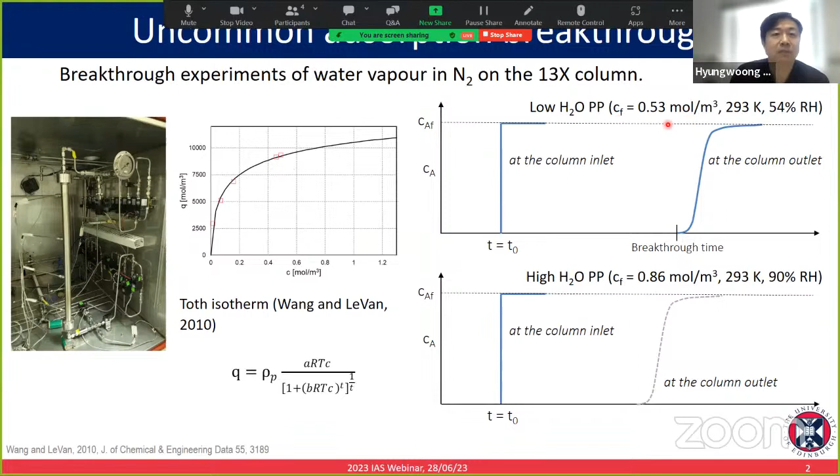When I did the adsorption breakthrough experiment using this column at low water partial pressure in the gas, the concentration of water vapor in the nitrogen was 0.53 mole per cubic meter, which is equivalent to 54% relative humidity.

Once I start the breakthrough experiment, I increase the concentration of water vapor at the inlet. After some time, the column is saturated with water vapor and the breakthrough starts. The water vapor breaks through the column, and the water concentration at the outlet increases gradually up to the feed concentration. Then the column is completely saturated, and we can terminate the adsorption breakthrough experiment.

Now I want to see the effect of the water vapor concentration on the breakthrough dynamics. So I increase the water vapor concentration in the feed to 0.86 mole per cubic meter, which is equivalent to 90% relative humidity, and I start the experiment.

What I expected was that the breakthrough time would probably be shorter, so the water vapor would break through the column earlier than in the experiment with the low water vapor partial pressure, and the concentration would increase gradually up to the feed concentration.

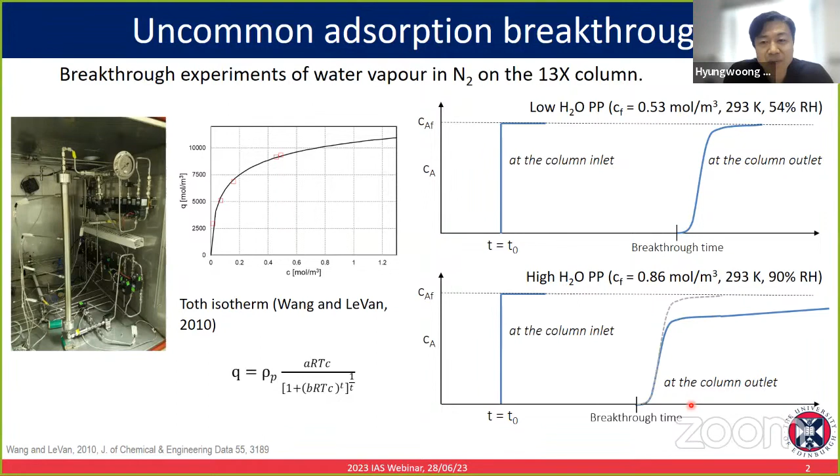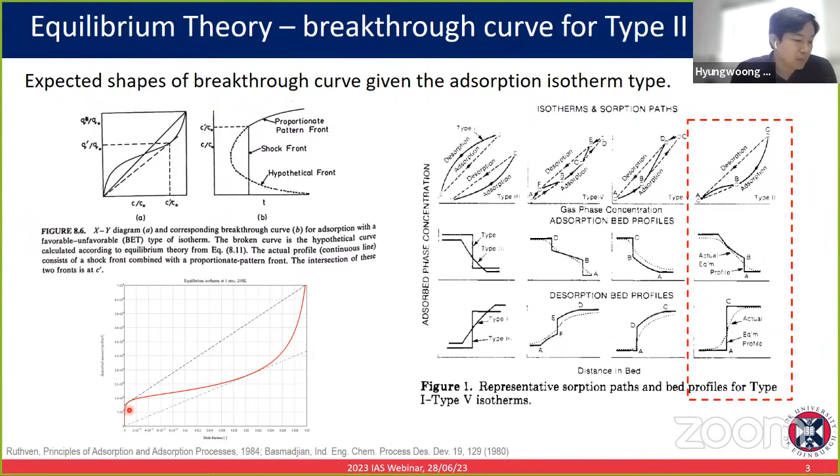So I extended the range of concentration for the water adsorption isotherm measurement, and yes, it is clearly a type 2 isotherm, with capillary condensation taking place near the saturation pressure of water at a given temperature.

So if you look at the experimental result of the adsorption breakthrough at the low water vapor partial pressure in the feed, this partial pressure of water is within the favorable region of the isotherm, so we get a simple shock.

But if you increase the water vapor concentration in the feed, you may see a simple wave formed in the high concentration region, at high water vapor partial pressure. This phenomenon is very evident.

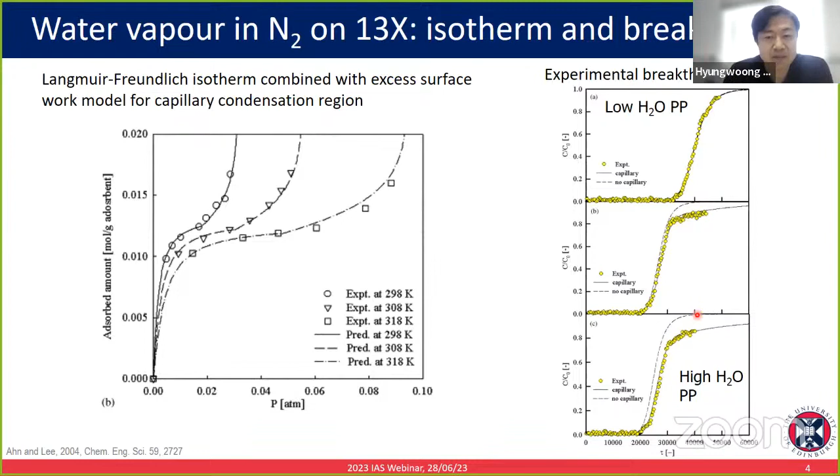So this is one example of how to use equilibrium theory to explain what happened in the experiment. We can also construct the adsorption and desorption breakthrough curves using equilibrium theory. This is the method.

The theory starts from the mass and energy balance around the adsorption column. The first equation is the mass balance, and we already apply the equilibrium theory to it. In this equation, we have beta I, defined as 1 over 1 plus (1 minus epsilon over epsilon) times the slope of the isotherm.

The second equation is the energy balance, where we also apply the equilibrium theory, so dq over dt is converted to dq over dT times dT over dt.

Now we need to solve this mass balance equation here, and we cannot take the velocity out of this partial differential equation because the gas velocity is changing with temperature. So we must keep the velocity inside the partial differential equation. To solve this equation, we need the method of characteristics.

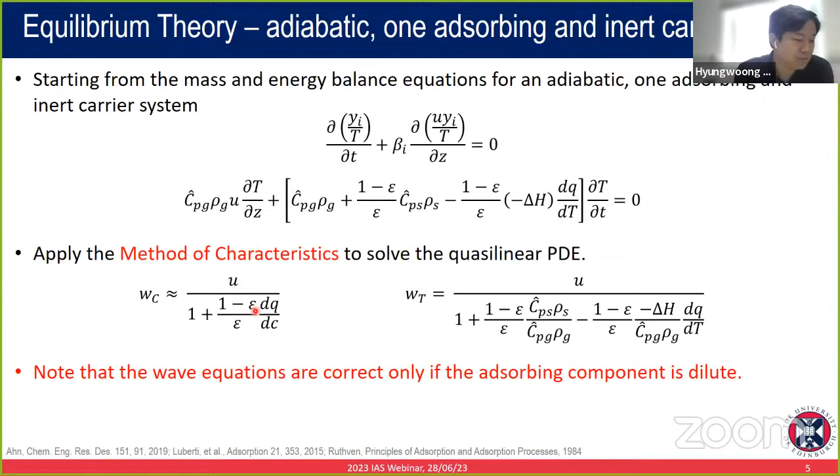In case of a shock wave, instead of the slope of the isotherm, we must use the secant of the isotherm. The same for the temperature characteristic. And as I said, the gas velocity inside the column is not constant. This fact is not considered well in previous publications. So you have to make sure that the gas velocity depends on the temperature and mole fraction as well.

For the concentration characteristic and the temperature characteristic, we apply the coherence rule to solve this equation, and then we can obtain the quadratic equation. From the quadratic equation, by solving it, we obtain two values for dc over dT. One dc over dT is positive and the other is negative. So we have a positive characteristic and a negative characteristic.

And sometimes the characteristic curve can be a simple wave or a shock wave. So I will explain this later.

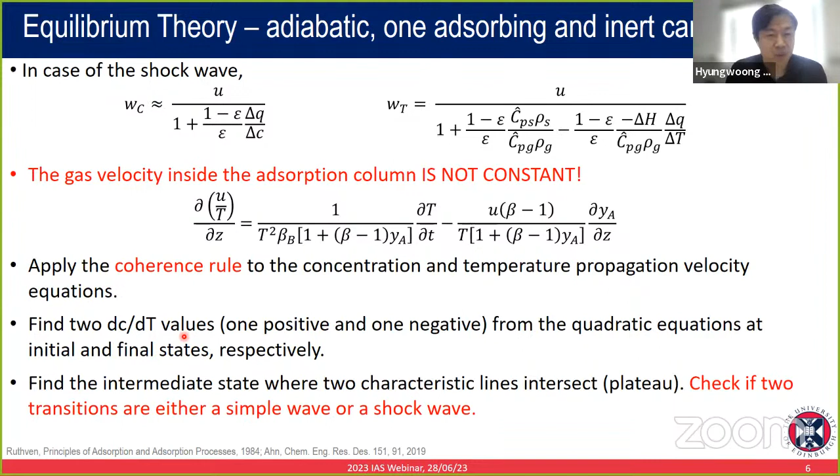So this is the characteristic curve obtained from solving the quadratic equation from the concentration characteristic and the temperature characteristic. This is the system for the benzene, nitrogen, charcoal adiabatic system.

And the important thing is this TR. This TR is the watershed point where the selectivity reversal takes place, which means if temperature is less than this watershed point, the positive characteristic approaches the temperature axis asymptotically. So this positive characteristic is asymptotic to the temperature axis, but the negative characteristic simply intersects the temperature axis. But if the temperature is greater than the watershed point, basically the opposite happens: the positive characteristic intersects the temperature axis, and the negative characteristic is asymptotic to the temperature axis.

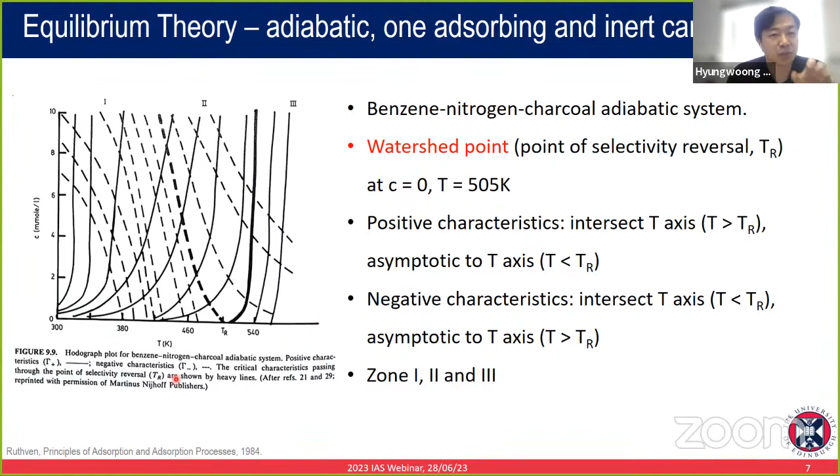So depending on these different trends, we can separate this graph into zone 1, 2, and 3. So how can we construct the breakthrough curve from this graph plot?

In case of A to B, A is the initial point. The initial point means this column is already saturated with the adsorbate, containing adsorbate at 10 millimole per liter. Then this column is regenerated by blowing in the component to state B. State B has no adsorbate, zero adsorbate. So it's the purge gas.

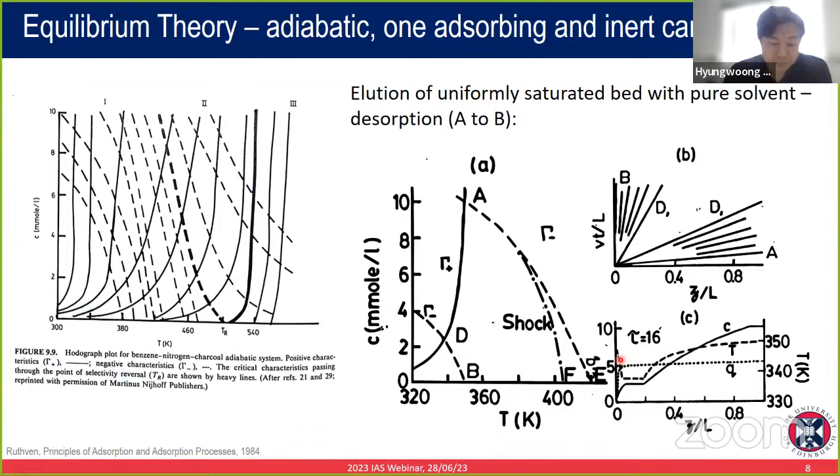And the other case is adsorption. In that case, point B is the initial point, and point A is the final point. The rule is the same: we always take the positive characteristic from the starting point. So in that case, the temperature is below the watershed point.

So what we can say is the positive characteristic is asymptotic to the temperature axis, so we need to move along the temperature axis. Point A is the final point, and we take a negative characteristic. Then if you look at the characteristic, we can find out that a shock wave is formed.

The shock characteristic is similar to the simple wave characteristic, but slightly different. Then this negative characteristic and the positive characteristic intersect at point F. That's the plateau.

So in that case, the starting point is B. There's no adsorbate inside the column at the start, and then it goes to the plateau. The temperature is going up, but the concentration does not change, so it's still 0. Then the second transition from F to A, the concentration increases to 10, but the temperature is going down.

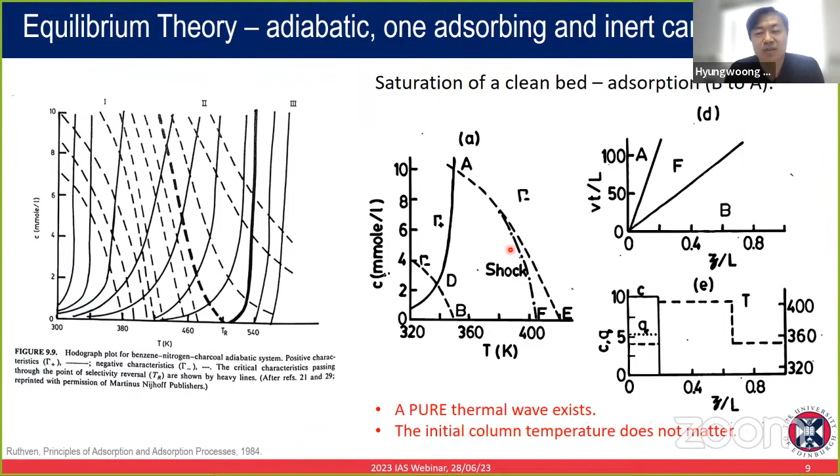The watershed point is very important for thermal regeneration because we should not use the hot purge gas whose temperature is greater than the watershed point. For example, B double prime is the initial point and H is the final point. So this is the feed. The column initially contains some feed, some adsorbate.

And this column is regenerated by blowing the hot gas H. If you have a hot purge gas temperature greater than TR, the watershed point, then we need to take the negative characteristic from H. This negative characteristic will always follow the negative characteristic of the watershed point. So whatever the temperature, as long as it is greater than the watershed point, it always follows this characteristic. Even though you increase the temperature, the breakthrough curve always shows the same dynamics.

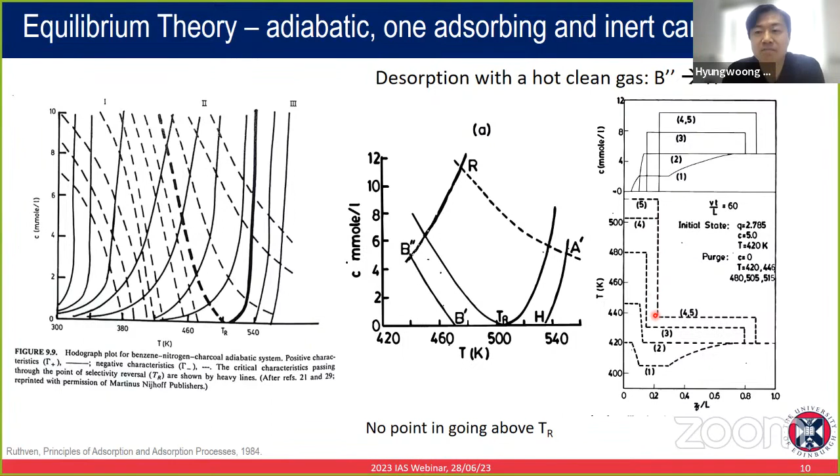So let's go back to my PhD. I did the adsorption breakthrough of water vapor on 13X, and this is the hodograph plot. This is the initial point—there's no water vapor inside the column. Then we started feeding the water vapor mixture at 0.523 mole per cubic meter at 293 Kelvin.

So the rule is the same: the starting point, we take the positive characteristic, and then we take the negative characteristic from the final state, and the two characteristics intersect each other at this point. The symbols indicate the experimental result of the water breakthrough, and the dashed line is the equilibrium theory result.

As you can see, there is a first transition where only temperature changes—there is no concentration change in the first transition, which means the pure thermal wave is formed. There's no concentration change, but temperature goes up in the first transition, and then that's the plateau temperature. In the second transition, the temperature goes down, but the concentration goes up from 0 to 0.523 mole per cubic meter.

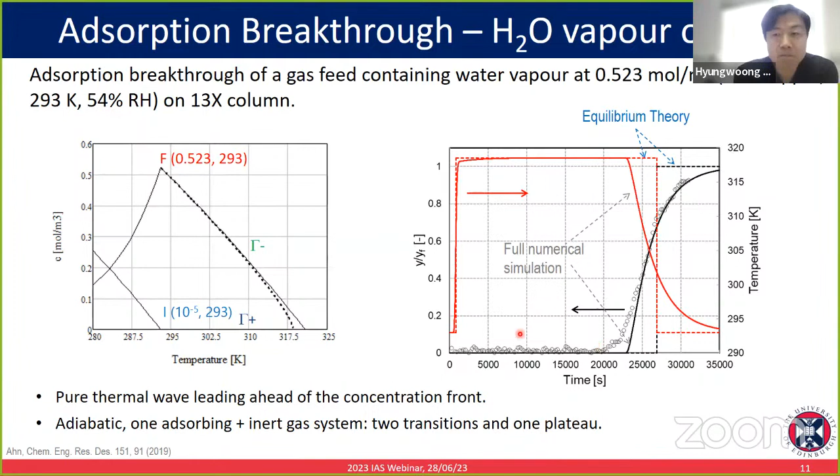And for the desorption, I used three different temperatures of gas: 423, 473, and 523. If you increase the temperature of the purge gas, what you can see is the roll-up of concentration increases, and the regeneration time is shortened. And the question is, can the equilibrium theory estimate this trend?

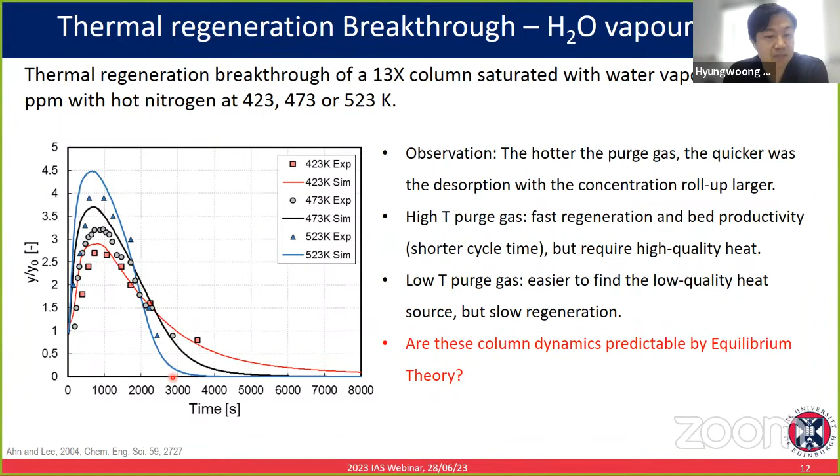It can predict this trend. So this is again the hodograph plot for the water desorption. I is the initial point—the column is saturated with water vapor at this condition. And F, three different F, means three different temperatures of the hot nitrogen gas for the thermal regeneration.

If you increase the regeneration gas temperature, as you can see, the plateau concentration increases, which means the roll-up of concentration during the desorption breakthrough becomes larger. Also, an important thing is that the choice of hot purge gas temperature must be less than the watershed point, because if you choose a temperature greater than the watershed point, there's no benefit from increasing temperature.

So that's the breakthrough curve of the desorption case. What is interesting to me is that in the case of 423 Kelvin, it's a simple wave—the dynamics of the desorption breakthrough is a simple wave. But if you increase the temperature, it's initially simple wave, then it has a shock, then simple wave again.

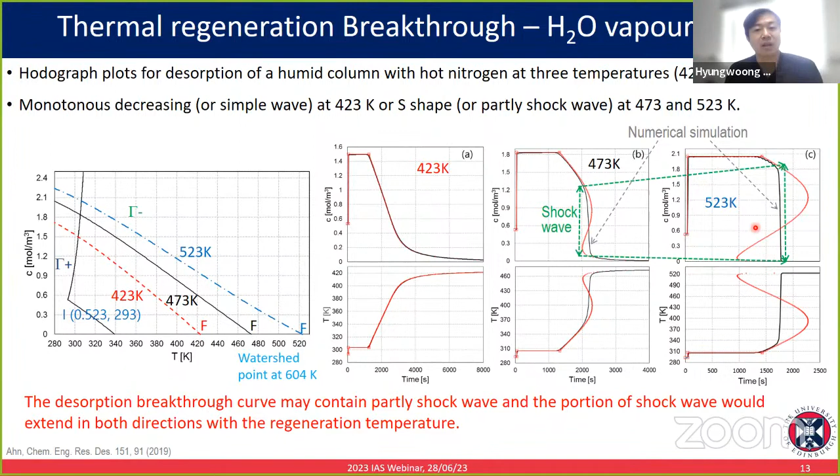If you increase the temperature of the hot purge gas, the portion of the shock wave increases, which means the desorption becomes more efficient—it can be finished much earlier. So that's what I found, depending on the level of desorption. For example, at the outlet of the column, the water vapor mole fraction decreases.

If you don't need a very vigorous regeneration, the temperature of the purge gas probably doesn't matter, because the time required for regeneration is more or less similar. But if you have to regenerate the column more rigorously, like to a dew point of minus 20 or 30, and you use a low temperature hot purge gas, it takes a long time. So in that case, you really need very hot purge gas to regenerate the column as quickly as possible.

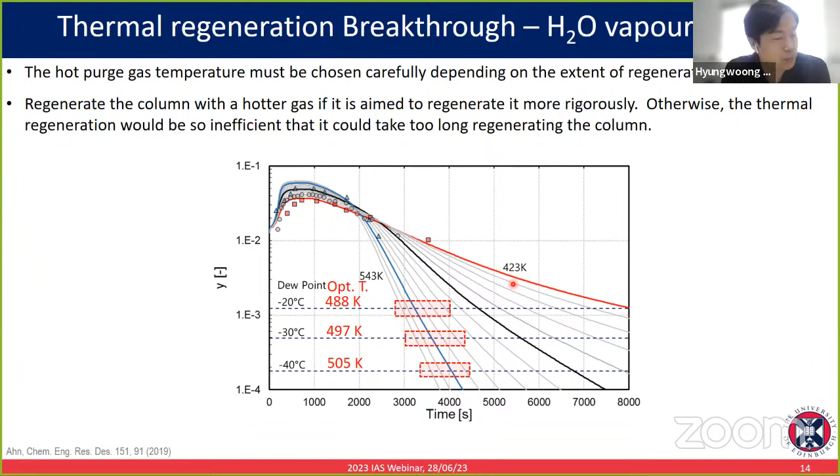So this is the temperature swing adsorption part, and now is the PSA analysis by equilibrium theory. I presume you already know how to derive the basic equation for equilibrium theory to analyze the PSA system, so I will skip this part.

The important thing for the PSA system is to estimate the product recovery. The PSA product purity has to always be very high, like 99 or 99.9, but the product recovery can change depending on the design of the PSA process or operating conditions. So in this example, I would like to show how to estimate the product recovery of the PSA system using equilibrium theory, without doing any numerical simulation or experiment.

That example comes from the Ruthven book. Probably I have to skip many parts to explain this concept very quickly, so if you're interested in the theory, please refer to this book.

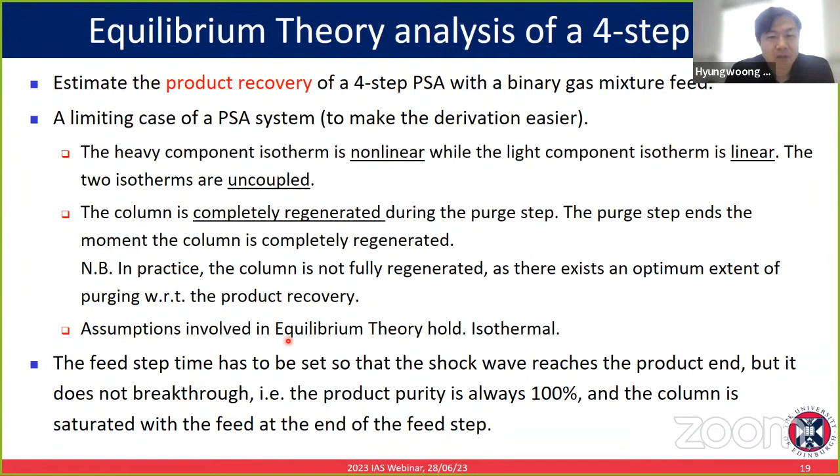Once the column is completely saturated with the feed, we have to stop the feed step, and then decrease the pressure during the blowdown step. Then the column is regenerated gradually by feeding the light component.

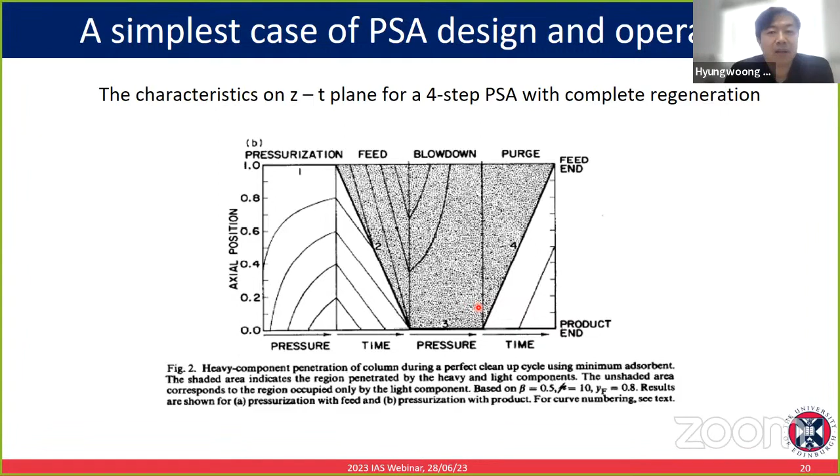So how can we estimate the product recovery? That is the equation. RB is the product recovery. The denominator here is the light component, total moles of the light component fed to the column during the feed step.

In the numerator, the first term is the total moles of the light component leaving the column during the feed step. The second term is the moles of the light component used for the pressurization. And the third term in the numerator is the total moles of the light component used in the purge step.

So that is the simple mass balance over the cycle, and we can obtain the product recovery, RB.

Now, what we need to do is find out the feed step time and the purge step time. The feed step time is TF here, and it's estimated by the column length L divided by the speed of the shock wave, that speed of the shock wave propagating from the feed end to the product end.

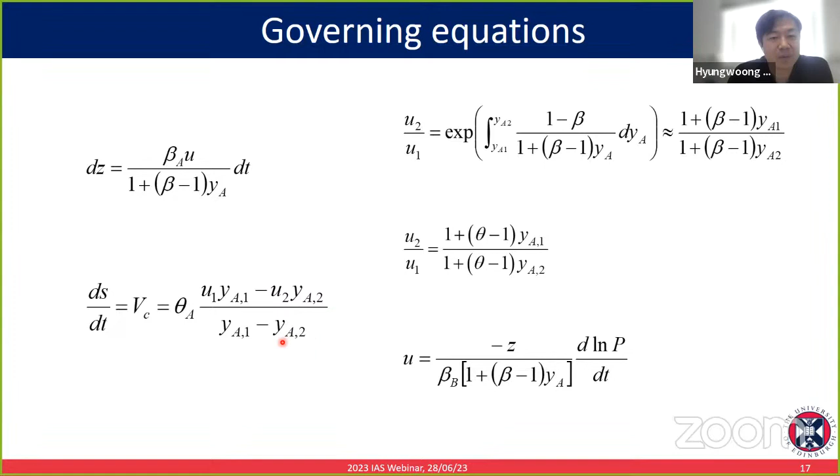And this is from this governing equation here. Theta A times... in this case, we assume a clean bed, so YA2, YA2_0, these terms cancel out, and YA1, YA1 cancel out, so it simply becomes theta A times U1, so that one.

And for the purge step, we expect to see a simple wave formed during the purge step, so we need to identify which simple wave is the slowest in speed during the purge step. Obviously the speed is inversely proportional to the slope of the isotherm, and the slope of the isotherm is the largest at concentration equal to 0. So we have to choose that concentration to estimate the speed of the simple wave.

So that is the speed of the simple wave, and L over the speed is the time. So we can find the total moles of the gas fed to the column during the two steps.

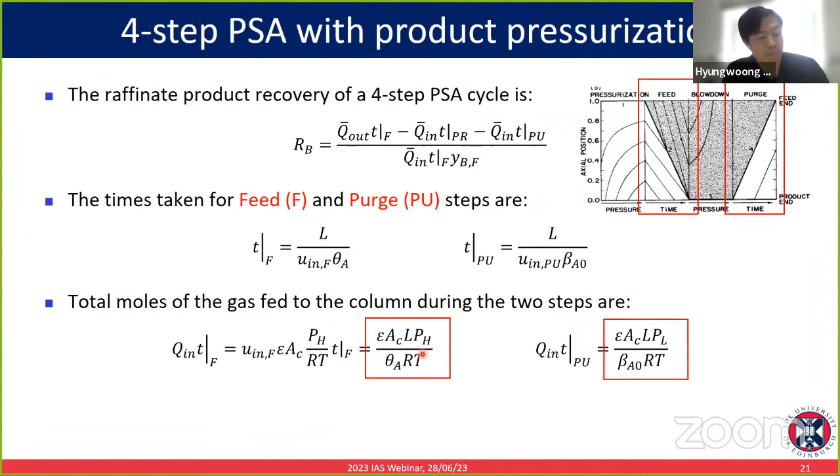We also need to find out the total moles of pure light component produced during the feed step. The time for the feed step is the same as before, but instead of Q_in, we need to find out what Q_out is. Q_out is the velocity of the gas at the outlet, which can be found from the governing equation.

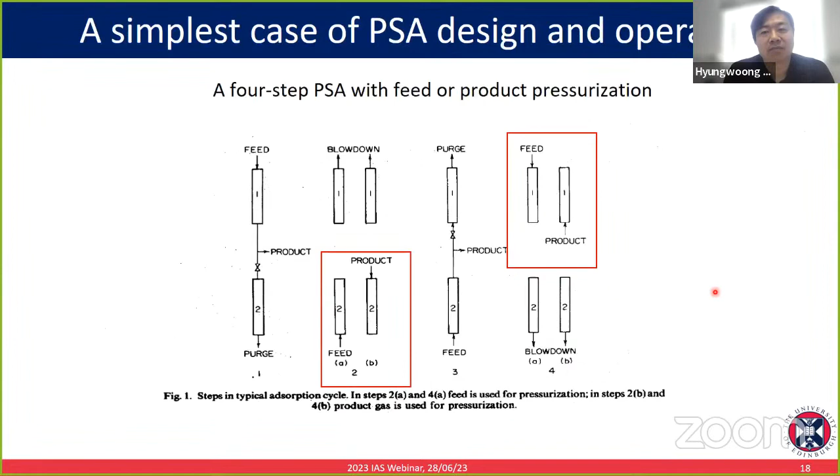Again, that equation - simply use it, and we can find the total moles of pure light product withdrawn during the feed step.

Lastly, we need to find the total moles of the light component consumed for the pressurization step. That's the pressure changing step, so we have to integrate the flow rate over the pressure range from PL, low pressure, to PH, high pressure. Then we can find the total moles of the light component used for pressurization.

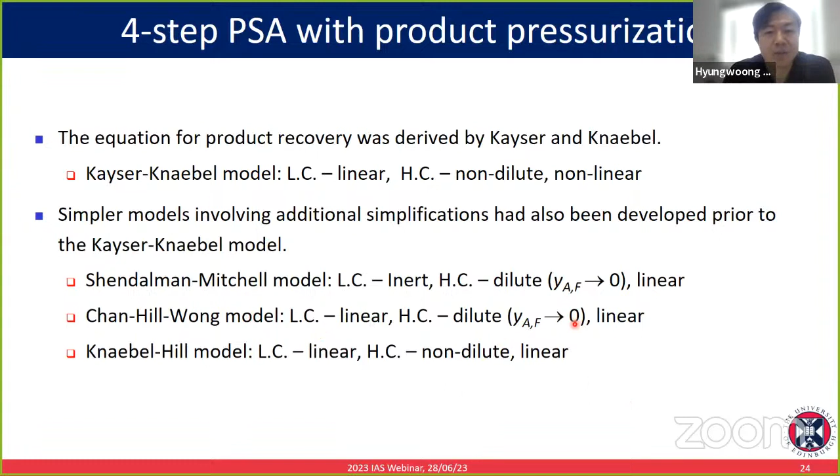Obviously, you can estimate the recovery from the 4-step PSA with complete regeneration, but complete regeneration is not realistic. To maximize the product recovery, you should not regenerate the column completely. Also, if you want to improve the recovery of the product, you have to add a pressure equalization step or co-current depressurization step.

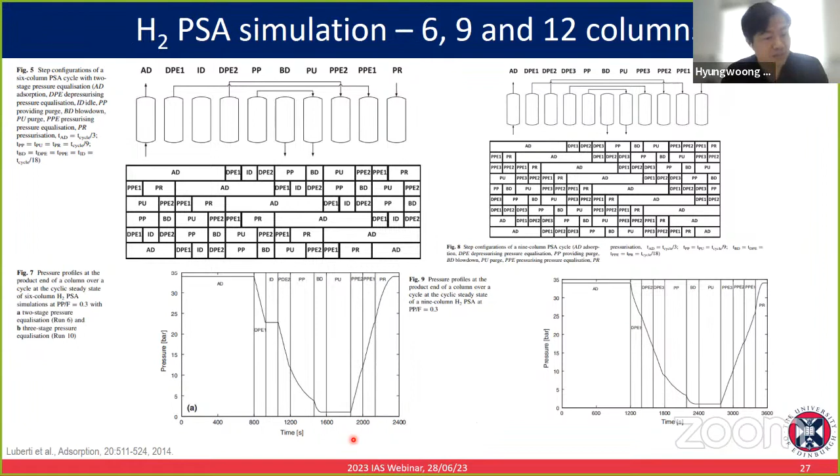Usually having more than one pressure equalization step can improve the product recovery. If you want to accommodate more pressure equalization steps, you need more columns. So if you increase the number of pressure equalization steps, you can increase the product recovery from 84-90% to 93%, okay.

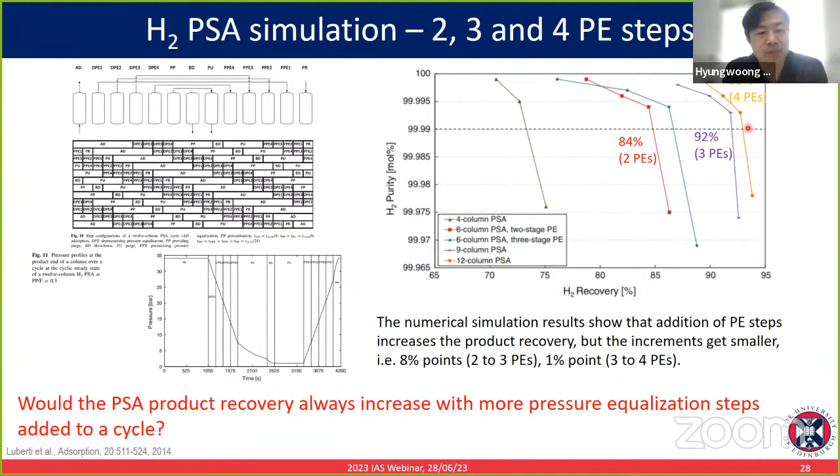So my question was: would PSA product recovery always increase with more pressure equalization steps added to the cycle? I did a literature review on this subject, and yes, if you increase the number of pressure equalization steps, you can increase the product recovery.

I simply chose Waldron and Sircar's work as an example, so I tried to study this.

Chiang did fantastic work in the past. He developed a very robust equilibrium theory model for pressure swing adsorption with pressure equalization and co-current depressurization steps. So what I did was simply use this model to analyze the PSA system.

In that model, the isotherm has to be linear for both components, and we can consider backfill or feed pressurization. We can estimate the light product recovery and the throughput using that model.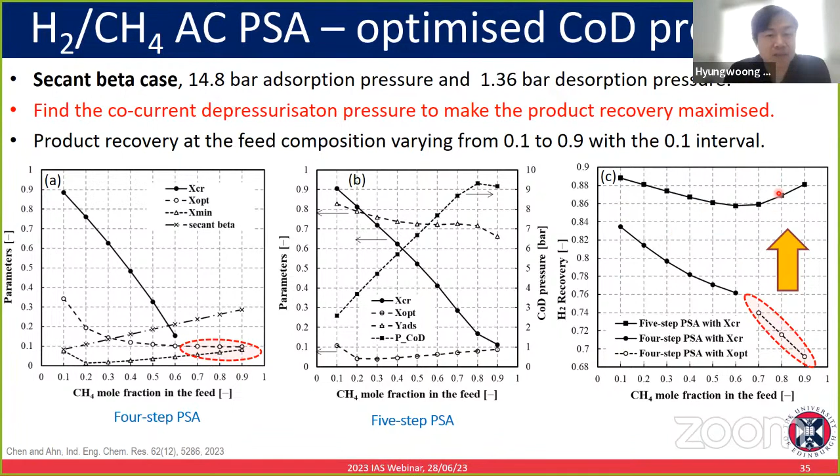This is the effect of the number of pressure equalization steps. Depending on the mole fraction in the feed, the optimum number of pressure equalization steps to maximize the hydrogen recovery can be different, okay?

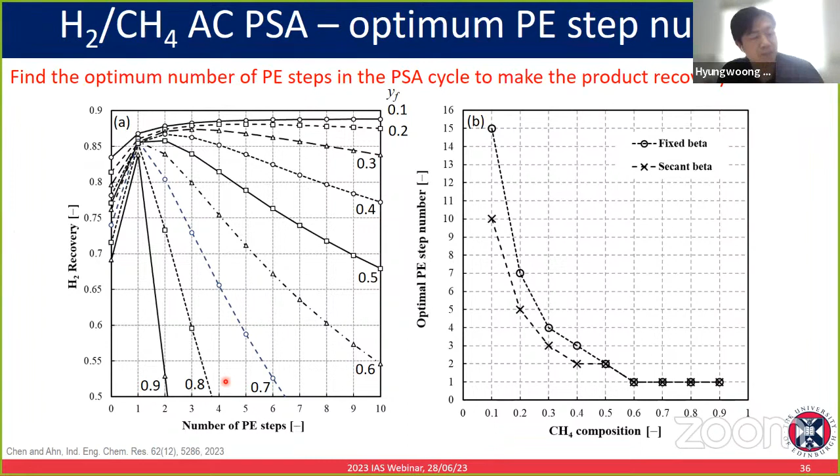At very low CH4 concentration in the feed, the optimum number of pressure equalization steps is very high, more than 3. But if the CH4 mole fraction is very high, like 0.9 or 0.8, then only one pressure equalization step is enough. If you have more than one pressure equalization step in that case, you will actually worsen the hydrogen recovery, so you do not need more than one.

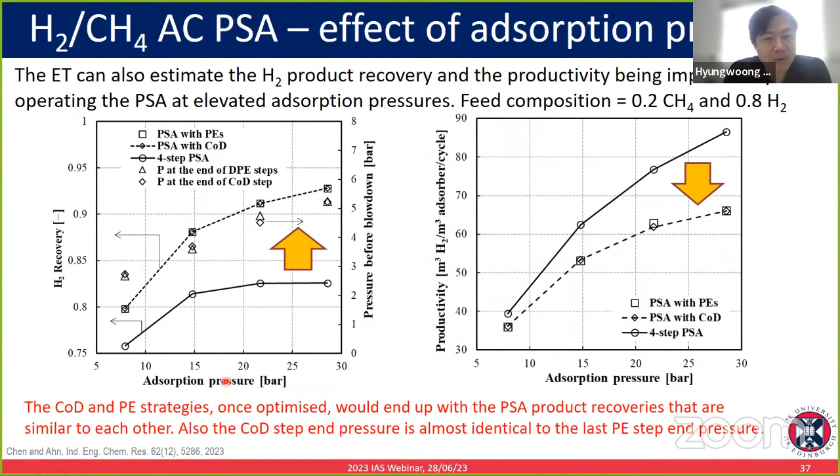So we can estimate the effect of pressure equalization on the product recovery using equilibrium theory, and also the result from equilibrium theory was compared with the numerical simulation result from the Waldron and Sircar paper. The equilibrium theory result was in good agreement with the numerical simulation result at the qualitative level.

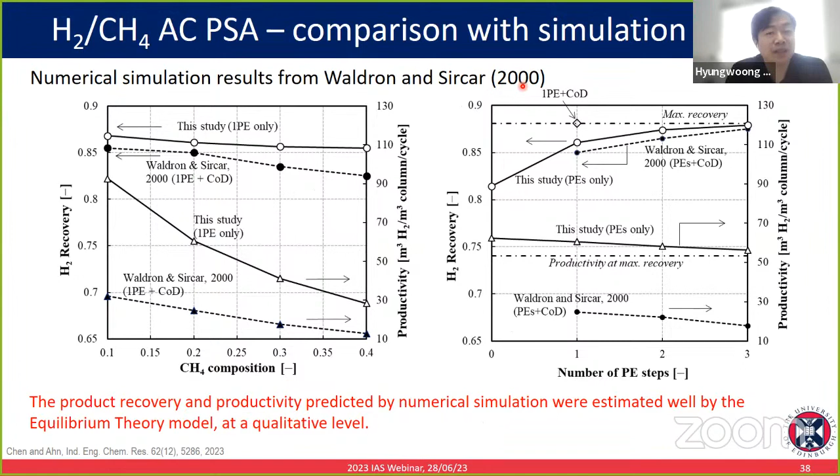Also, the way of pressurization can be feed pressurization or product pressurization. Knaebel et al. did a numerical simulation study with optimization, and they found product pressurization would be better than feed pressurization in terms of hydrogen recovery. Equilibrium theory basically gives you the same message: product pressurization is better than feed pressurization in terms of light component product recovery.

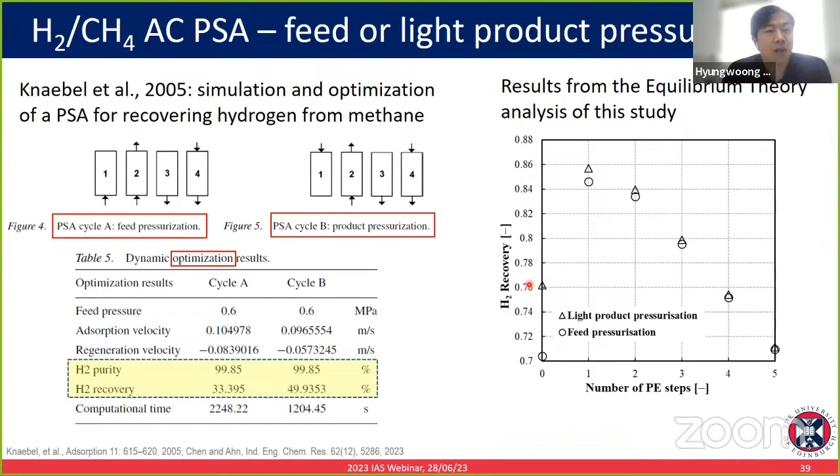So the conclusion is the equilibrium theory is simply the mass balance around the column. If you are very good at mass balance, then it's very easy to understand how to use the equilibrium theory in analyzing TSA or PSA.

Most of the examples I showed in this presentation are from the Ruthven book, where you can find a nice explanation about adiabatic column breakthrough for adsorption and desorption. I also explained how to estimate the product recovery from the 4-step PSA with product pressurization, where the column is completely regenerated.

The important message I want to deliver is that equilibrium theory can be utilized to optimize a PSA system for maximizing product recovery or maximizing bed productivity, without numerical simulation.

Currently I'm working on optimizing the CO2 capture vacuum swing adsorption process using equilibrium theory. If I'm given another chance to present a webinar, I would like to explain this. Thank you very much for listening to me.

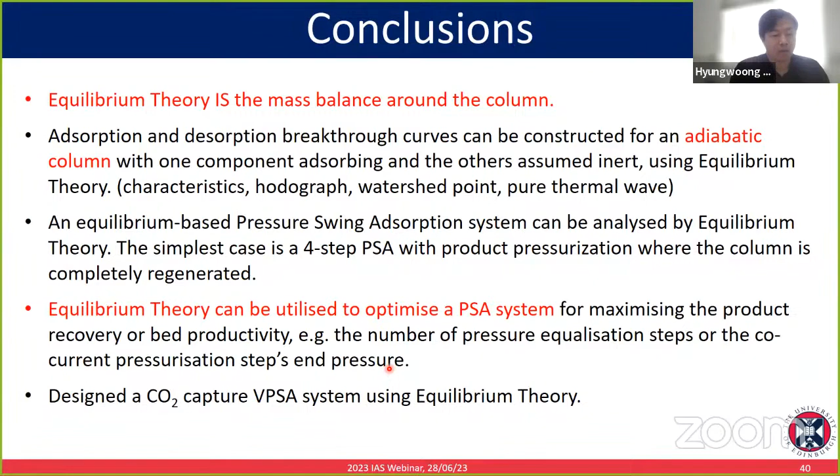My recommendation is to read this book. There are two books authored by Ruthven, and this is one of them. It's very useful for newcomers in this area, so I recommend reading this book. Starting from this book, which cites a number of papers, once you need more information about a subject, you read the original papers. That's what I did.

Also ask me a question. We also compared the numerical solutions and that of equilibrium theory, the profiles and histories. Do you have any comments on the comparison of the computational time? Can we say that equilibrium theory is much faster than the numerical solution?

Equilibrium theory is just instant. I'm solving the model using MATLAB, and MATLAB takes less than 1 second.

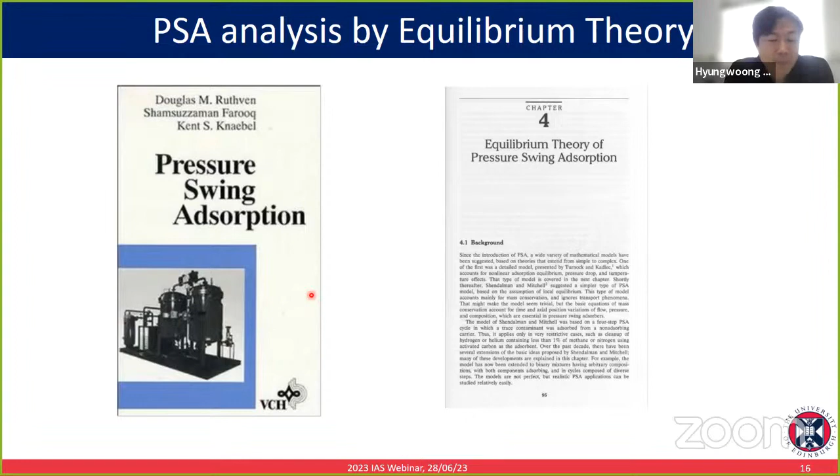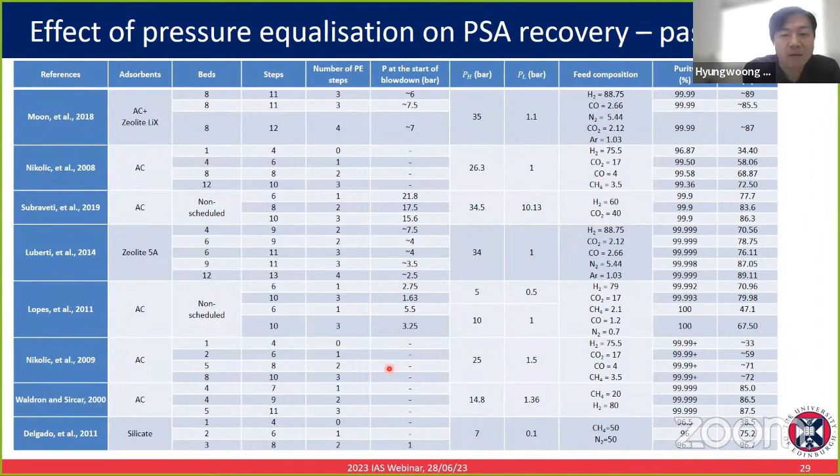Yes, I mean the information we need is the isotherm, because we neglect the effect of mass transfer resistance or axial dispersion in this model. So this is the information we need to estimate the performance. If you change the adsorbent, you will get a new isotherm, right? Given the isotherm, you probably need to optimize the adsorption pressure or desorption pressure to maximize the performance of the PSA process.

I'm currently using the equilibrium theory model to estimate the CO2 product recovery from the PSA system, so it can be utilized for the heavy component. The PSA system can also accommodate light reflux, heavy reflux, light product pressurization, heavy product pressurization, or a rinse step. So any steps can be accommodated, and it's very flexible once you understand how it works.

A good follow-up to that is, can we also apply the equilibrium theory, the same analysis shown here on this slide, to, let's say, an extract cycle? Should that be straightforward? Sorry, can we extend the equilibrium theory analysis to an extract cycle as well? The extract cycle, or the heavy product cycle, in other words? Yes.

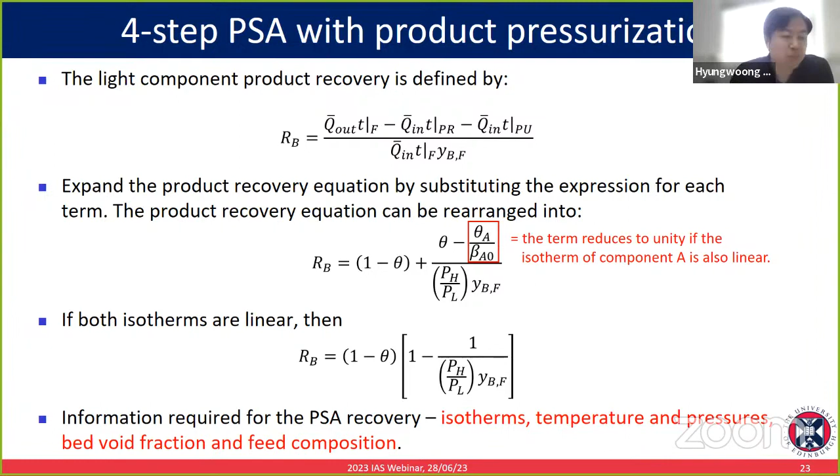One of the recent examples, you can also find the information in Ruthven's book. There's an example of a PSA system containing a heavy reflux step, and he explained how to analyze this cycle with a heavy step using equilibrium theory. I used that equilibrium theory from the book to estimate the performance of the PSA system to capture CO2, and I published the paper a few years ago. So yes, it's possible, it's not that difficult. The important thing is how much we have to regenerate the column during the purge step. That's the important parameter.

If you regenerate the column completely, then the product recovery becomes rubbish. So you have to optimize the extent of purging during the purge step to maximize the product recovery. Also, during the adsorption step, we have to make sure that the shock front is formed along the column, which relates to the critical extent of purging. Otherwise, we cannot apply the equilibrium theory.

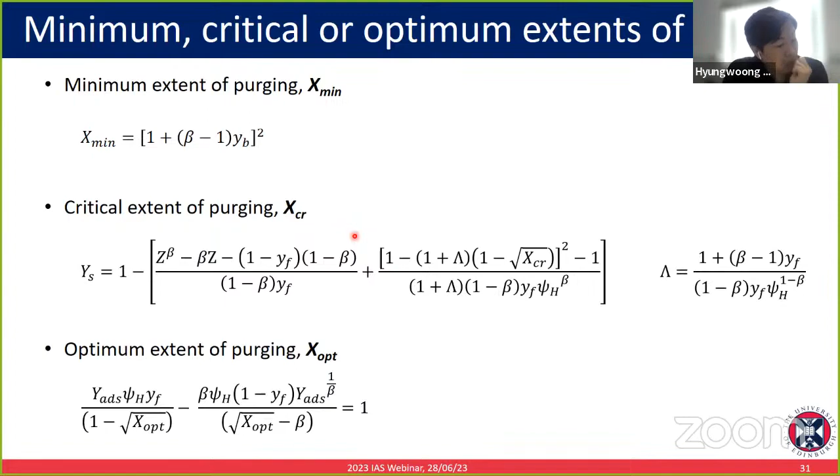We have a question from YouTube as well. The question is about the effect of the number of equalization steps. Can it be extended to equalization via tanks, or is it only valid for bed-to-bed pressure equalization? You mean bed-tank equalization, right? Yeah, can it be extended?

I think Professor Jim Ritter's group did fantastic work on this subject. Their work involved increasing the number of pressure equalization steps without having to increase the number of beds, by having a buffer tank. So yes, I think it's possible, and there's some papers already published from Professor Jim Ritter's group.

We have one more question on YouTube. Can equilibrium theory work when you take kinetics into account as well? That's a tricky question.

Yes, but limited. There is some example in LeVan's book where equilibrium theory was utilized with mass transfer resistance also considered. In that case, if I remember correctly, the isotherm has to be very simple, like an irreversible isotherm. Then there's a way to include the effect of mass transfer resistance.